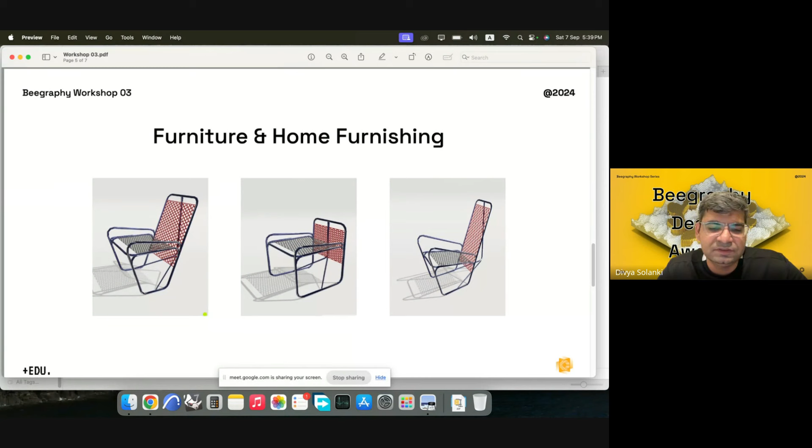You can always modify everything in the configurator mode. This would make it much closer to what the BIM ecosystem does.

Then the third category is education. Here we'll deal with a certain aspect of education where it makes it much easier for students to understand large scale concepts which are quite difficult to understand. So this can easily help us through the platform of BeeGraphy.

So I'll start with the first category that we have today, which is fashion. This category, sorry.

This category, the intent of this particular section of the workshop, 3A, is first we'll have the workshop intent.

Then we'll try to understand the existing references, and then we'll try to build a design logic, and then we'll explore the design on BeeGraphy, and we'll try to import some materials, and then the challenge.

The brief of the challenge provided on the UniXYZ platform is: this particular section would be for fashion designers, jewelry designers, textile engineers, tech enthusiasts, and it's related to style and innovation in fashion and accessories.

It wants to get out timeless aesthetics, creating wearable pieces, but with function and fashion. At the same time, it needs to harness the capabilities of BeeGraphy as a platform. And how do you incorporate parametric design into your fashion pieces? It needs to be form, functional, and wearable.

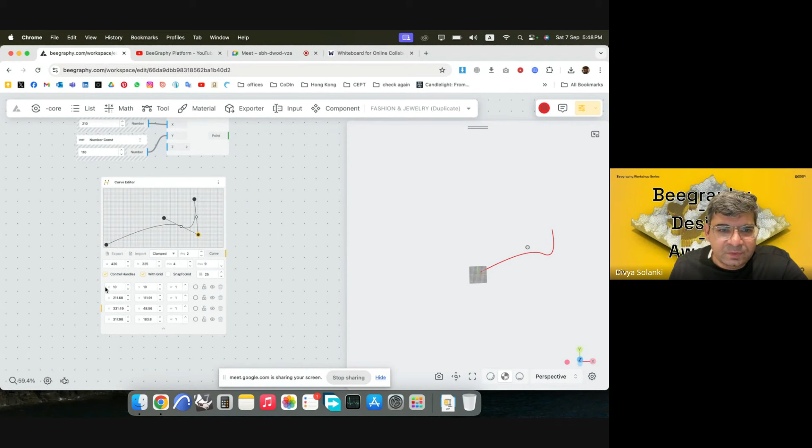The next thing I want to do is find out where my starting point is. One of these would be my starting point, coming at this one. So I'll keep it at this point and develop a geometry around it. I want it to be a closed curve, so I'll click on this tab here and make it closed. Now I have a loop, and I can modify these points.

I want the starting point to be at this location only. So I'll double click on the curve at any point so I can have more points in the space, and develop a basic geometry for now. As you can see, we have a basic geometry, centered around - I'll just move this a bit aside. So you can see we have our base point and a curve based here.

Now I'll switch on the mannequin. We want this curve to be located somewhere around the chest area of the mannequin, so somewhere here. I'll move this curve first here, then move it up. For doing that, I'll use vector to point - we want to move the geometry from the base point, which is here, to the 0,0,0 grid point.

So construct point, and this would be our second point. We now have a vector which goes from here to here. Now I'll move this ahead, then move this curve to that point - and you can see it has moved to that point. Now I'll move it up, again in the Z direction.

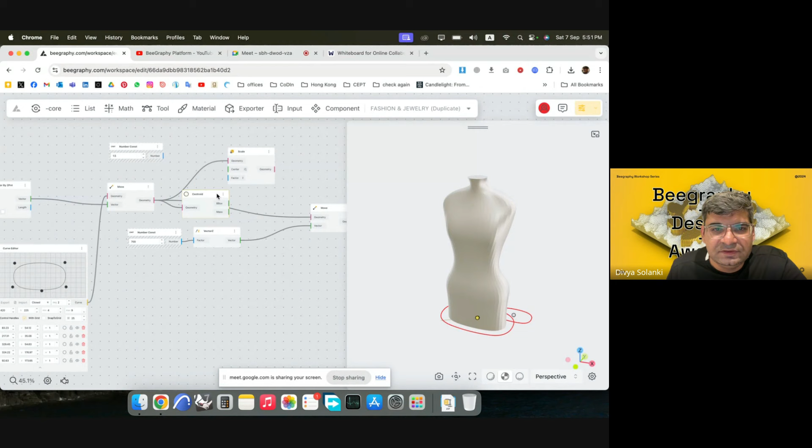We'd have to give it a centroid, which we can get from the geometry itself. Oh wait, I think we need to do this before we move it, because we already have a base point in place. If I go back, the center point we can take from the base point we made, and the scaling I'll make as a range.

So 1.5 range input - this would be scale first curve. Then I think I'll move the geometry, so I'll move it ahead. Now you can see the geometry is somewhere there. I'll switch off the previous parts, and we'll try to modify this geometry based on the outline of the body there.

So we can easily move any of these curves now to fit onto the mannequin. I can introduce more points - there are two ways to do this. You can either double click on one part and introduce a point, and it would be visible here at the base.

Or if you want to be very precise and introduce a point between two of these, you can check this point and that point, and then come here and add a new point. So then this point could be taken a bit ahead - I'll move this a bit back.

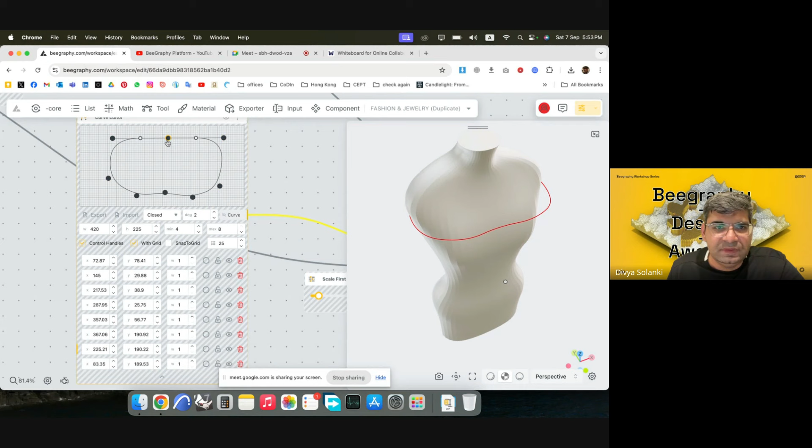And we'll do the same thing between these points. I'll add a point here and move it a bit ahead. And we'll add another point between these two, which would be here. And then this can take the shape of the back.

Divya, I can show you a trick. When you click on the points, you can see the white control points. If you click on one of those, double click, it will add a point there. So even that way we can do that. Thanks, Lonik. Yeah, you're welcome.

So we just have to get the contouring of the body right, so that it can help us make some of the form. So I have a base form ready. Can make it a bit more symmetric. And the amazing thing is that you can always modify the shape later on.

So I have one of the curves ready. The next curve I would want to develop is somewhere around the base, so I don't have to redo the whole thing. I will just be copying this.

I will also introduce you to a node. If I double click on one of these wires, we'll have this node popping up, and this is basically carrying the data from here, and this could be put in place of directly connecting it from the main output. So if I put it here, you can see I can use it like that.

So now if I have to develop more curves, I can just copy this whole set multiple times. I will develop this. If I decrease the height to 500, you can see the curve now is at the base, and I can now reduce down the points to fit to the waist.

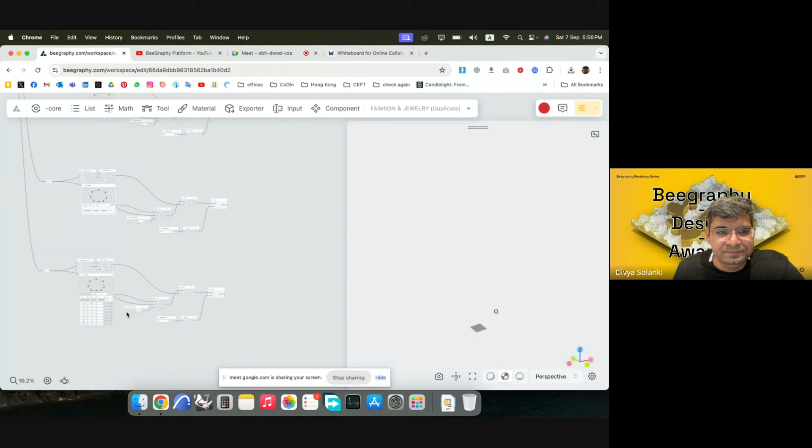The next thing we can do is for the lowermost part. So I'll copy one more time. And this time I will try to rotate the base. I'll take this down to 0.

My mannequin actually starts at the grid point, so it's supposed to go up, but it could change as per your subject. So if I'm doing something for the lower part as well, then I'll raise the mannequin and introduce the legs as well. In this case, I don't require that. Okay, I think this is too wide, so I'll just reduce down this a bit.

And then I'll try to rotate the bottommost curve. So for doing that, we can go to the lowermost curve. We will write rotate, use the rotate axis tool. You just have to provide it the curve, and then you would have to provide the centroid.

So centroid can come from either the grid itself or the geometry. So centroid, put in the geometry, I'll put this into the center. Then we would have to give it an axis. I wanted to rotate on, say, the y-axis, which is this part. So I'll just give it the y-axis, vector y, and this will plug into the vector.

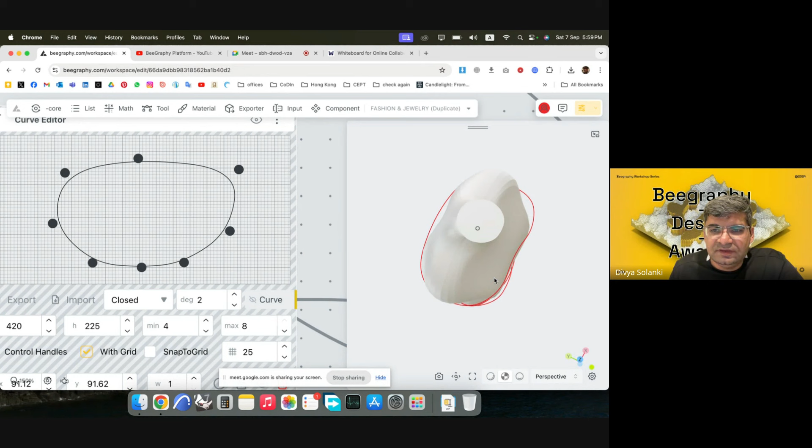So we have our base curves ready. Now what we want to do is give some more character to this dress, because if we directly loft it, it would look very flat. Maybe we can try to develop a chevron pattern, and then introduce graph mapper into the exercise.

I'll start with the topmost curve. Here we have it, sorry it's a bit laggy. So we have our topmost curve here. What we can do is divide the curve into points and take every alternate point in and out.

I will divide the curve by count, so I'll put in the geometry here. I will take this a bit ahead because we can copy it again and again. I will increase the count to 50. Sorry, this needs to be a range input, so I'll just write 50 range, and make this the chevron count.

And I'll put this in count. You can see it has developed points for the curve. Now what I can do is make two lists out of the points.

I can put every alternate point in a different list. For that we can use dispatch list, and I'll put the points in. You would have to provide Boolean for that, so I'll just write true, false. Boolean is basically true and false, so it's like 0 in one list, 1 in the second list, and that pattern continues 0 and 1 continuously.

So I'll put two of these, one false and one true. If I switch off the previous, you can see it's 25. I would have to switch off the previous as well. So you can see alternate points have been put in list A, and the other list has the other points.

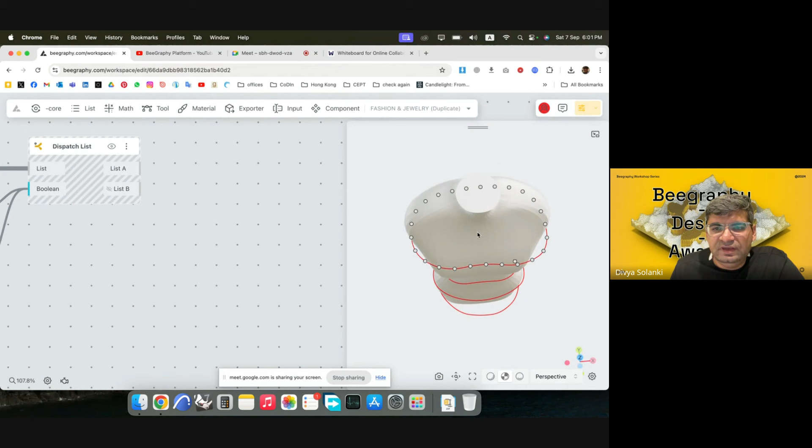Now what we can do is preview on one of them, and then try to move these points out. For moving this point out, we would require a vector going in that direction. Maybe that vector we can achieve by the centroid of this shape, so I can take a center point, and from the center point have a vector going to this point, and that gives us a direction.

So I'll do vector 2 point again, and then introduce a centroid from the curve. So this is the moved curve. I can make a node here, and use this node for the geometry. So this gives us a center point.

Now what we can do is make a vector from point 1 to point 2, and we have the vector. So now we will just move these points and give them an amplitude. The vector is there, but we would still have to give it an amplitude, how much distance it has to move, and I'll plug that into the vector, and into the geometry because that is the geometry we want to move.

Now what we can do is try graph mapper here. Graph mapper can basically give us quick variations without manually moving each point in a gradient. First thing we can do is try a simple one, I'll just move these points by a constant of 15. So you can see these points have been moved out.

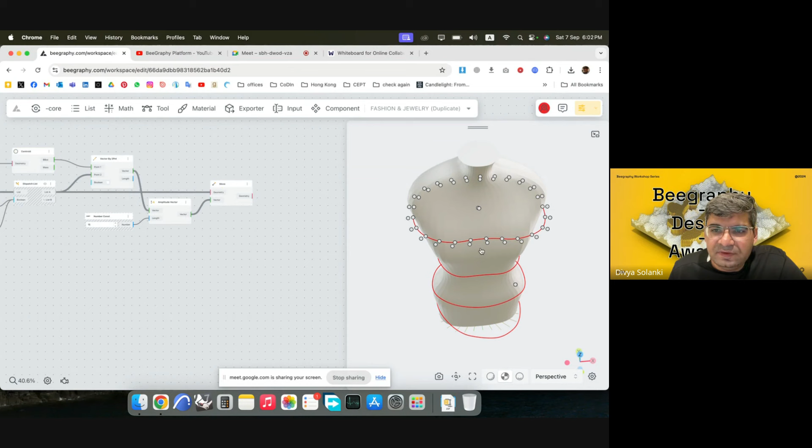And then what we would have to do, we have the other set of points as well, these ones, and we would want to develop a polyline going from one list to the other. So first we would have to weave these two lists together. The first one I will do is this, and then the second one I will do is this.

But it is asking for a number, which is basically a Boolean. We would have to give 1 and 2, so it asks for a pattern here. I will just write 1 and 2, and give it both of these numbers as our pattern. What it will do is weave from the first list first, and then weave from the second, and this continues for the whole list.

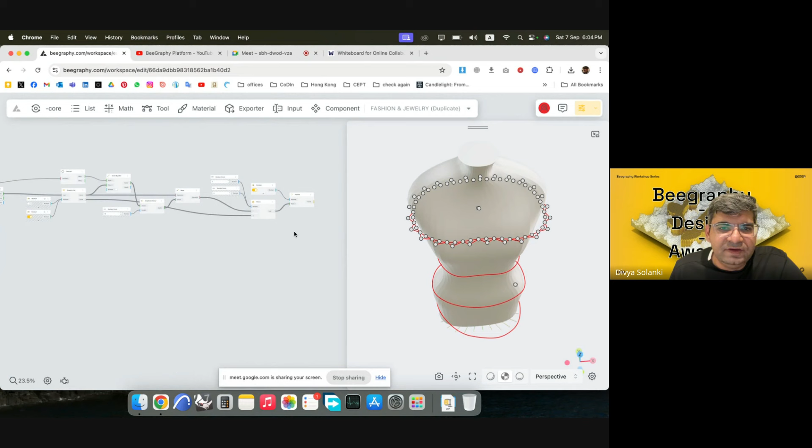So now again we have 50 points with us that we can interpolate. I will use a polyline, this one, and then plug this in. Boolean requests you if this needs to be closed or not, so I will write true for that. I'll get the Boolean and put this in here. Now if I switch off the whole of the previous part, you can see we have an interesting chevron pattern to the curve.

Now, what I wanted to try with the graph mapper was that maybe we don't want this to be a constant distance from the base curve. Maybe we wanted to go in a gradient. So instead of this 15 here, which is a constant, we can try remapping based on the number of points we have.

So if I open graph mapper, you can see there is a base where the graph would be located. I can select multiple graphs, maybe I'll go with a sine. The domain for this graph is 0 to 1, 0 to 1, and 0 to 1. So basically the graph is only this purple thing that you see here. It's only restricted to that right now, and the domain is only going from 0 to 1, 0 to 1.

But we want it to reflect here, like this smooth result. We want it to reflect here. For that, we would have to give it the number of points we want to move out.

So if I go back, I can first analyze what my list length would be. If I get the input from here, I can see that my list length is 25, and I can base my graph on this list count.

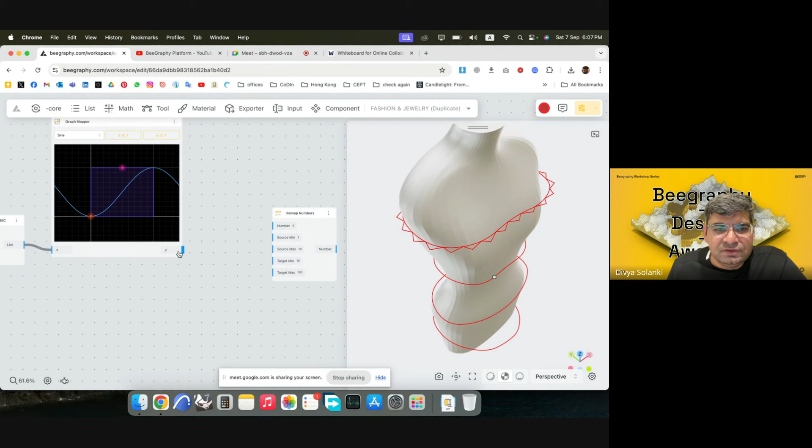So now we have this pattern with us, basically, and then what we can do is remap this pattern onto our distance from the base curve. So this source is going from 0 to 1, so the remapping thing would also go from 0 to 1. The numbers that we would have to provide it are these, which is the output of the graph mapper, and the source would be 0 to 1. So we would have to again provide a domain which goes from 0 to 1, because these numbers are going from 0 to 1.

So now if I put this here instead of the number constant, you can see it has already mapped it, where it starts slowly increasing the distance as it goes till the end of the curve. So this could be an interesting twist to a simple pattern.

I'll move this ahead. We can also change the curve. So if I go for a Perlin, you can see it is not as variable, but I can increase the size to increase the variation. Oh, it's too small, yeah.

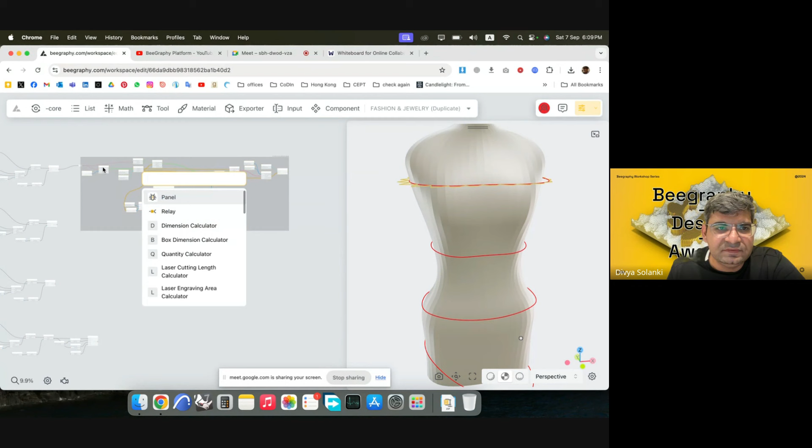We just have to copy the same pattern to all of the curves that we have, so that's why I made a node there. I'll just move this part a bit ahead along with the node, and then copy this whole geometry 4 times. So I'll put this into the node. It can be a bit laggy if there are a lot of polylines involved. Yeah, so you can see it has been replicated there.

Then I'll do the same thing again for the next one, and the next one. Yeah, I'll move this here. Once you see that hand symbol, then it has detected the node. Same with this one, great.

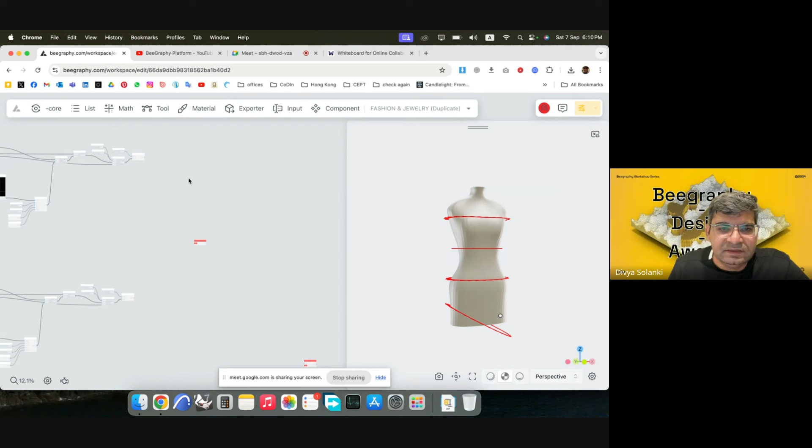So now we have a variation in all of them. What we can do now is just loft all of these together. I'll introduce a loft surface component, and also introduce a list merge. This is basically merging all of these different curves, but in a sequence. So this is our first one, I'll start with that. I'll take this up a bit, and put this in. And then if I go to the list, I can add a point. I'll move this down, plug this in.

Sorry, it's a bit laggy. I did not introduce a point, so I'll add a point, and then I will add the third one. Then same thing I'll do for the last - first add a point, and then I will add the last one.

Now I can put this sequential list into the loft surface component. I'll zoom in, then plug this in. I'll just check if the list is in a single branch - it looks like it's a single branch, so I'll plug this in. I can increase the degrees to 3.

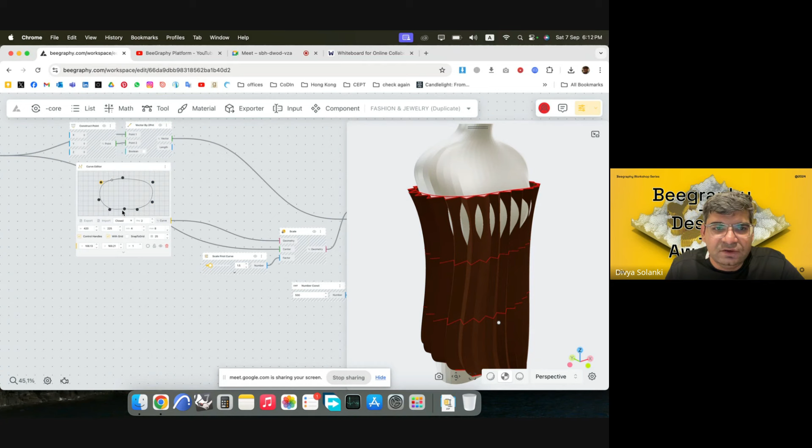Looks like the dress is still intersecting with the mannequin, so we would have to modify one of the curves. Maybe we can try modifying the middle one a bit so that it fits. You can clearly see the parametric nature of the script. So maybe I can increase the size a bit here as well as here. I can also add more points. It looks flat now.

You can see how easily we can modify each of these curves, and we can also change the height if we want to increase or decrease the size of the dress. Maybe I want this to go a bit lower, so I can go down to the last one and change the height from 0 to -50 or more, maybe -500. So you can see we can take the dress much lower if required.

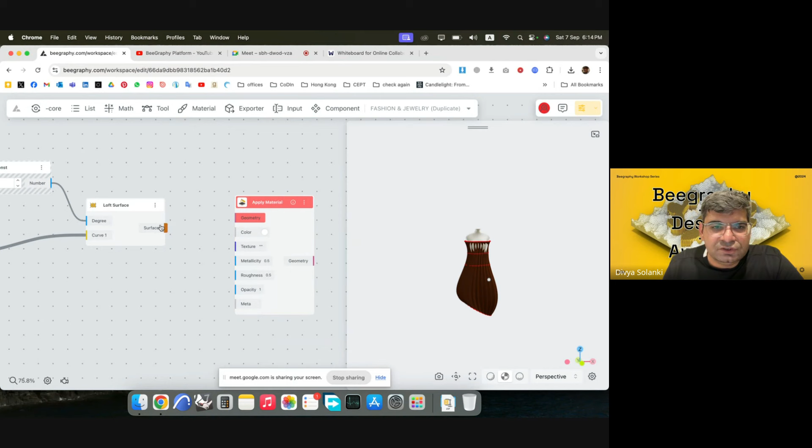Then what we can do, we can also try importing textures to it. For doing that, we can use an online library. So if I write texture, apply material - I'll just go material. Geometry we want to apply is this. Now we can give it a texture string. Let me just show, just a second, I'll stop sharing.

So for giving a texture to the dress, what we can do is we can give a string output here. So if I write text input - if I write input, we have it here, and then the string we can provide.

We can provide the string from the Polyhaven website. If you go to the Polyhaven website, you can go to their textures at polyhaven.com/textures, and then here we can go with a fabric texture. There are multiple of these, preferably ones that are slightly older. If I go into the fabric pattern here, I can use this one. I can just copy the texture URL, the name of the texture, and put it as an input file in the text input parameter, and put this in texture. It can take some time, but then you can see it reflect.

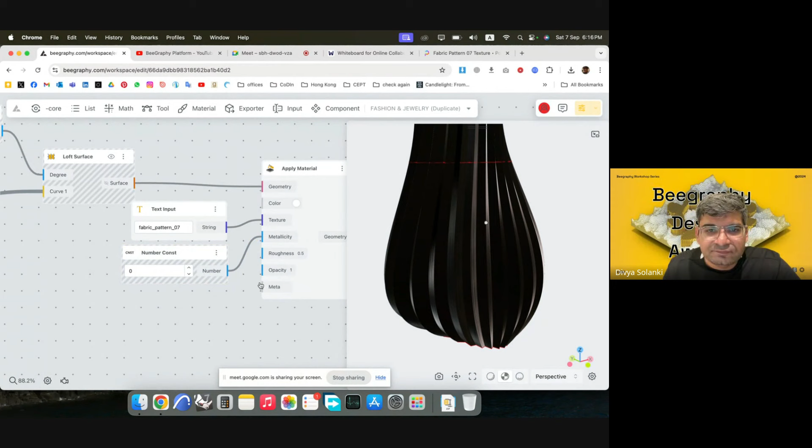I would have to switch off the previous paths. I would have to decrease the metallicity to 0, roughness to maybe 1. In fact, this was experimental.

Have you tried this particular pattern? No, not all the patterns. I'll try a different one. Maybe we can go with, especially, denim. I'll try denim first.

You can see it has taken the denim's color and the texturing, so this can help us give a good gradient for the dress. Now I can maybe try to develop - in the same way that we have developed this, we can also develop a necklace for the object. But I think I will like to stop here because we have 2 more workshops.

I think you can explain about the material part, because right now it works only with Polyhaven, right? And some of the older textures, which Lernik mentioned in the Discord.

Currently, it is based only on Polyhaven, but there are other things being tested. So the textures that are older than 2 years would work better - they would give the correct results. If you go down, you can check what year is written on the texture as per your requirement. For instance, brown leather is 4 years, so I can just select this and use it as our texture in text input. You can see it has taken the texture color, so it would work mostly with textures that are 2 years or older. Some are 4 years, so that would be fine. The newer ones are still in beta testing, so they would be available later.

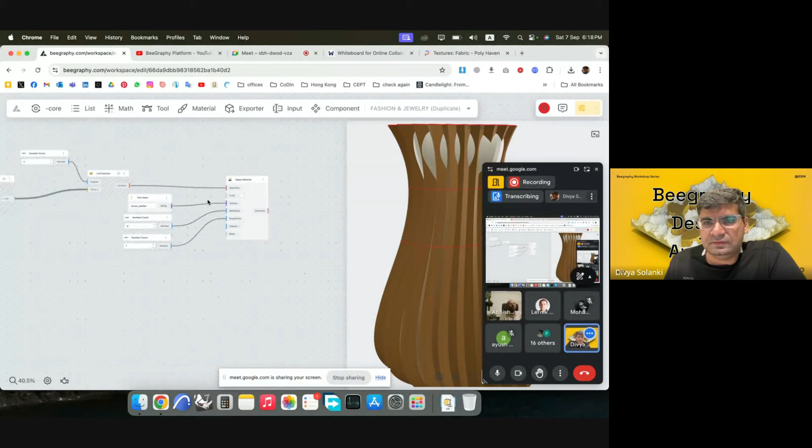Divya, if you rotate to the back of the model... yeah, it's flat there. This one, yeah, it's because of the curve. So it can take some time getting the geometry of the mannequin right, like the geometry of the curves right.

Each one can do it individually. So this is like the third one. So if I go and modify, if you can modify the last one, I think the rear side... if I can just modify, say, this part, then you can see it will modify accordingly.

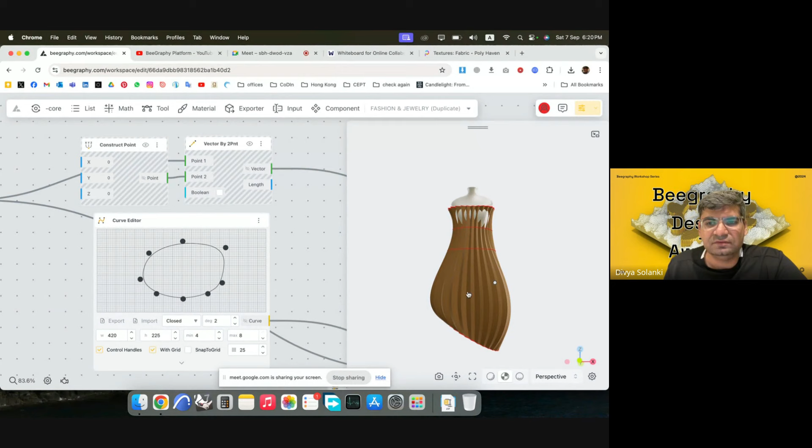So, I mean, you can increase the number of these lofts to as many as possible based on wherever the geometry is changing. So I can maybe introduce one here, like one more, and then it could be more closer to the mannequin that we have, so it will make it easier for us to design. So yeah, I mean, all of this is parametric, so it could easily be modified.

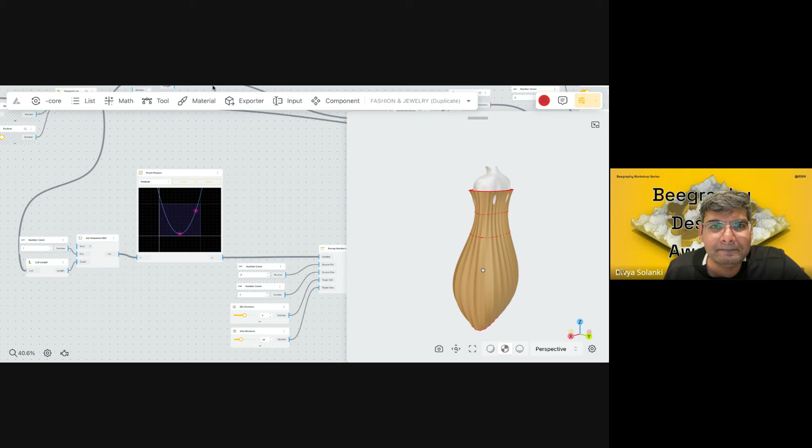One more thing - when you're using number constants, is it because it's easier for you to type in directly into many ports, like changing the default value of the port? Where, this one? Yeah, like if you disconnect the wire. Yeah, I'll just do it. Oh, sorry, yeah, you can click on the one.

No, right in the port. Yeah, at the top, where the one is. Yeah, over there - I think the cursor doesn't point in the right place. So you can change it from there.

In many cases it's more convenient, unless you need a slider. I personally prefer to add a number constant, that way I remember what is the input provided by me versus the default values that exist in a node. It's very useful because it makes the script a lot cleaner—whenever there are standard values, they can be added directly without stopping the process.

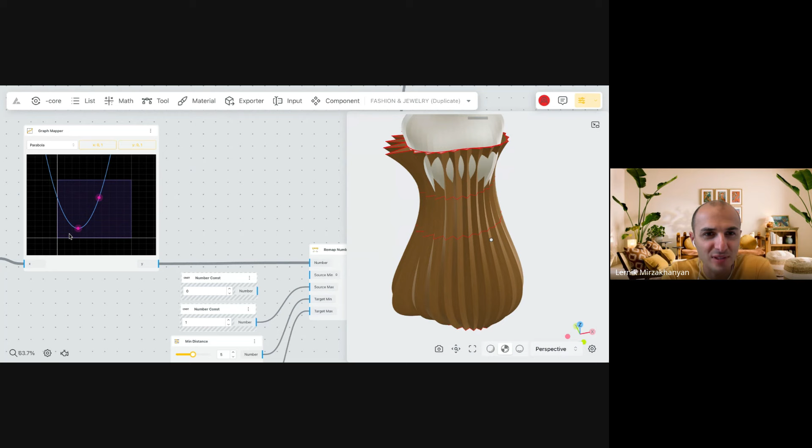One more trick which is standard in Grasshopper, but in BeeGraphy we thought it would be easier: an easy way to disconnect a wire from the port—in fact, all wires from the port. You don't have to drag all the way, you just hold control (or command on a Mac) and click on the port to disconnect. Especially when the ports are far from each other, it makes it a lot easier.

There's a question from June—not really a question, but she wants you to show the material node block and how you applied the texture. So if you can please repeat the process of applying texture. Sure, before Divya repeats it, I want to add something.

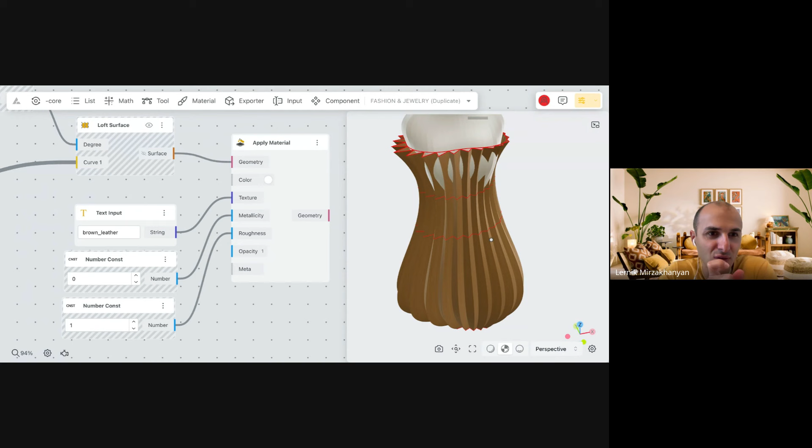Divya, maybe you can show what I said and what you were actually doing. It's the same thing—once you put the geometry into the apply material node, you can provide it a color as well. But if you want a texture image, you can use a string input. Then you can adjust the metallicness, roughness, or opacity of the objects. I can try that—if I put this here, I can reduce that down. Sorry, it needs to be between 0 and 1, so maybe 0.5.

So the next thing we want to do is give a texture input. If we go to the Polyhaven website, you can go to the textures section, and you'll have multiple textures based on type. You're not sharing the screen, just the tab. Oh, just the tab, sorry. Can you see this now?

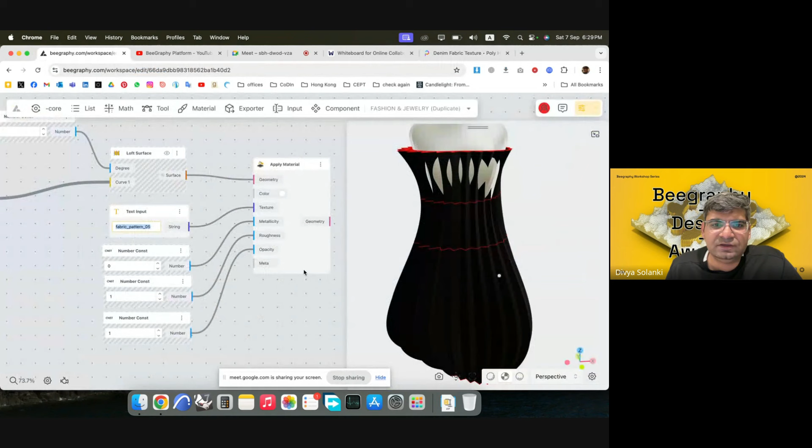This one is 10 months old, but the particular component works better for textures that are 2 years or older. For me, when trying the denim fabric, this was working. So you open the textures page, go to the URL, and select the last part of it. Then you go back to BeeGraphy workspace, and in the text input paste the last part of the URL, and you can see it has been mapped here—that's the UV mapping, though changing it through UV mapping is a longer process. So this is how you can basically apply textures to your objects.

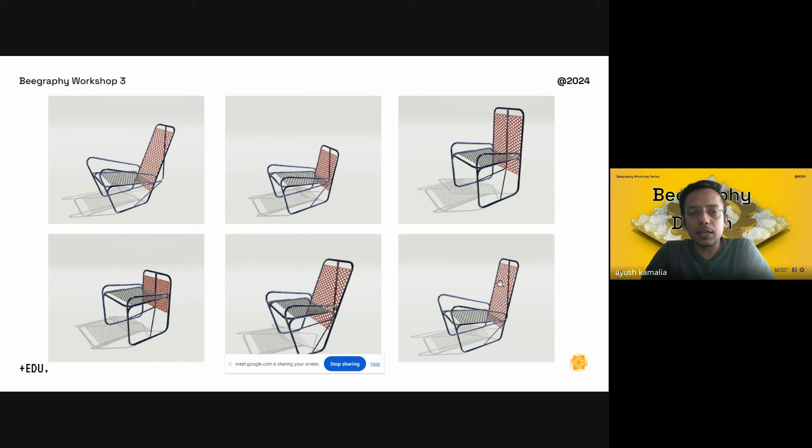So it could be a low backrest lounge chair, a normal work chair, or a dining chair, whatever you want. You just define one process once, and then at a click of a button you can get another design out of it. Let me give you a sneak peek of how and when we can get another design.

Let me show what we will be able to achieve by the end of these 45 minutes. This is my configurator mode. I'm pretty sure you're aware of it, but if not, no problem, we'll go into detail in the next hour. What this mode empowers us to do is that we, as designers, are not required to share the script or the process with anyone.

The first thing, being a completely online tool, there is no requirement for anybody... Let's say if somebody is your client and you want to give him the freedom to just change the chair the way he likes it. They are not aware of how to use the software, they might not be having it, so you can just share this configurator link to them.

All the variables can be seen on the right part of this window, and they can easily change the parameters which they like. So for example, they like a higher handrest instead of a lower one.

Let me just reload this so we can get onto it. In the meantime, we can start setting up our script to achieve that result.

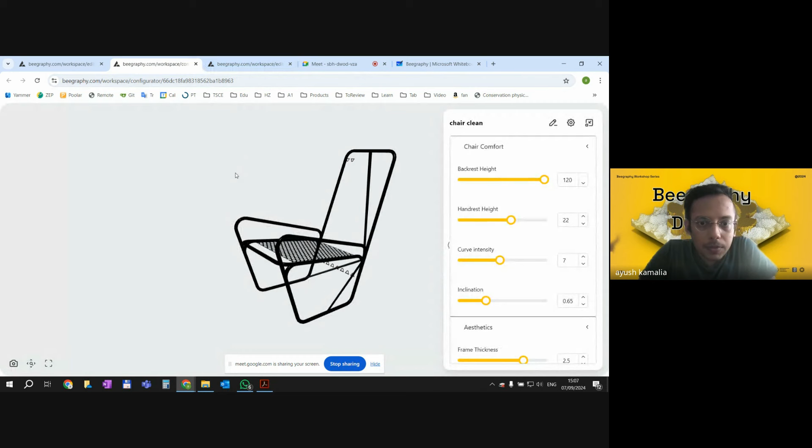We have our chair. Let's say I want a smaller handrest, and then we immediately get to see the design on the left. We have so many different parameters about aesthetics, how much meshing you want to have here, what should be the thickness of the frame, a sleek design or a bit bulky one, and most importantly the ergonomics - what is the front width we want, how high we want it to be.

With this, we get the power that I need not to compromise with a standardized product from the market. As a designer, one of our biggest intentions is to provide as much comfort to the user as possible. So based on individual design preferences and individual body preferences, they can configure their chair and immediately see how it looks.

So now let's get into it to start. If I wanted a static chair, it could be done in a much simpler way. But with this, we are trying to parametricize everything as much as possible, so there are no static inputs - everything comes from the user or is connected to the other parts of the design.

So looking from outside, it might look like the script is quite long, but the intention is that by having a slightly long script, we get the freedom to have any design, any configuration out of it in the future, based on our personal needs.

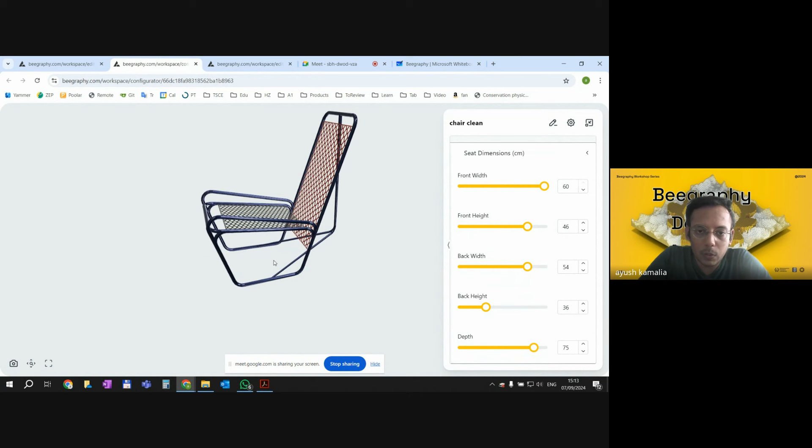Okay, so now I have these 5 range inputs which the user can provide. I think I have all the inputs required to create this piece, the one side where people actually sit. Let's see how we can create this piece, let's just do a little sketch.

Ayush, I think you made the depth too big, I mean the max. Oh yeah, it should be 75. So let's say this is the kind of side panel we want to achieve. What we can do is create these 4 points based on the width, depth, and height provided by the input, and then connect them with a polyline. Then in the end we can provide a fillet if we want a curvilinear feel to it. So let's start creating these 4 points.

The bottom left thing: first, as I told you before, we want to make only half of the chair because we'll mirror the other half. So whatever the user-defined input is for the width of the chair, we just cut it by half, divide by 2, so that we are making just the right part of the chair. I can take a division and divide by 2. Since I always want it divided by 2, I can just enter that inside the panel itself rather than having a user-defined input.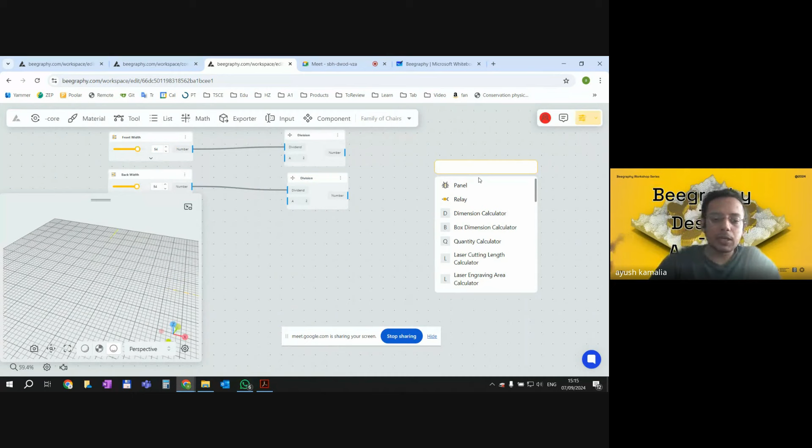Let's try to create this point here. It should just have the front width. And this other point should have the back width as well as the depth of the chair. Let me start by constructing a point. It's at 0,0 at the moment, but we want it to be at the front width point, moving in the x domain.

So this is perfect, this is the front bottom point. I can have the same point at the back on the x side, but it needs to move in this direction too, so for that we put the depth on the y side of the chair. Great, so we got the depth and the width of the chair on the bottom side.

Now we want the top points as well, where people are actually sitting, the sitting height. So we just have to take these 2 points and move them in the z direction. I can copy the same point and apply the front height as the z value here. Perfect, it's pretty high, let's get it a bit down.

For the back side, we can take the back point we defined and move it up in the z direction. Great, we get the point. If the back height reduces, this point should ideally go down. It is happening, so we are okay, it's happening as expected.

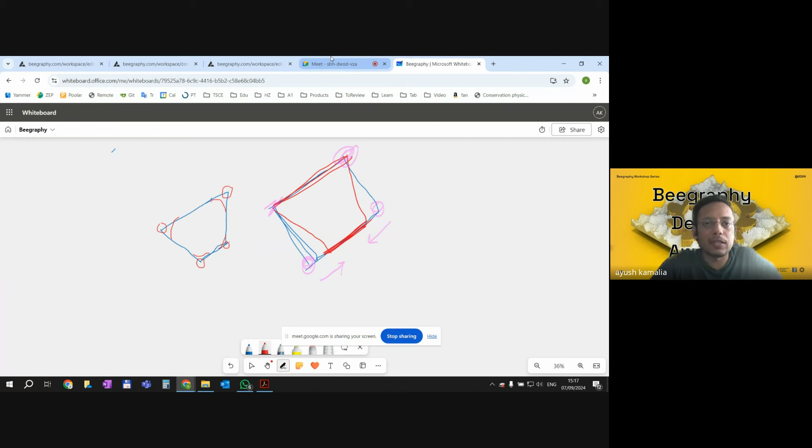The second thing we can see here is that we are not defining perfect rectangles on the side. If I give the front view of it, it's not a rectangle, but rather we have a slightly smaller base, and then we get a panel that looks something like this. The top 2 points are okay, but the bottom 2 points are right now at the front and back location. We have to move them inwards if we want the base to be smaller than where people are sitting, so we just have to shrink them in.

Multiple ways to do it. Probably how we can do it is by creating a line between them and then scaling that line down from its center point. So let's first create a line.

No, this is the top line. We want to scale our base, so we have to use these points, the front and the back. Perfect. And now I want to scale it at the midpoint of this line.

So first, scaling goes to geometry. And at the midpoint, we already have a component known as middle point. Let's get the curve through here, and let's get the point as the center point. Now, if I just turn on the visualization of this line, we see that the line is getting bigger because we have a scale factor of 2.

It's up to you whether you want the user to have control of this factor or if it is a static part in your design. For me personally, I would like the users to take care of how much scale they want the bottom part to be.

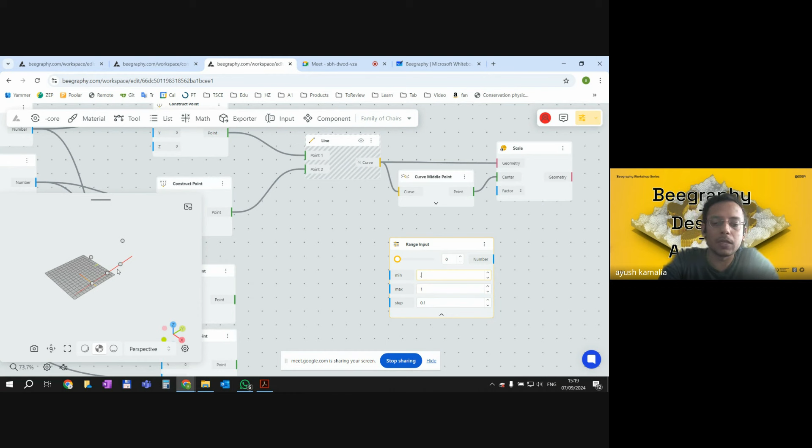So I can add another range input. I do not want it to be bigger than the top part, so my maximum range is 1. And I also do not want it to be smaller than half of this, because then the chair will become unstable, so let's put 0.5 as the minimum limit for it. And then if I put it in the factor, we see that I have a smaller base now. I do not want to see this middle point.

And what we saw some time back, is that we need these 4 points, and then we are going to create a polyline and fill it. To get the points of this line, we can just directly use the endpoint component, and we will get these 2 points.

So let me switch off the visualization here and the visualization of the line, and now we have the 4 points. Simply, we can merge them to create a polyline. Merge will just combine all of these individual points together into one list. So if you go to the list...

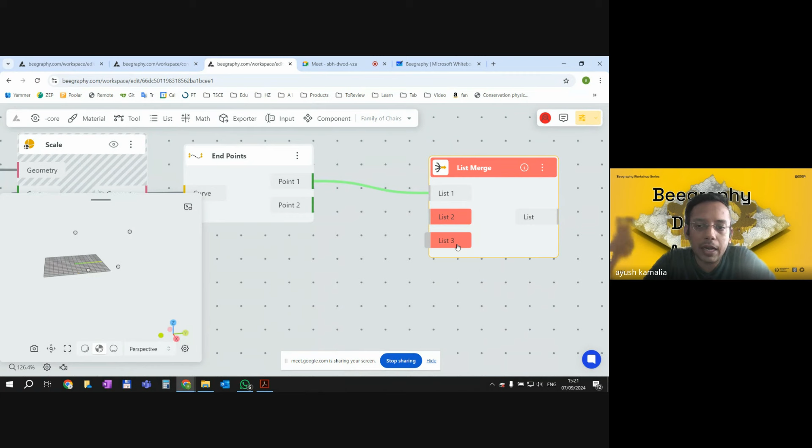Visually you will see only one port to provide all your input, but there is a hidden feature. Whenever you click on any of the input nodes, just click on add port, and you can add as many input ports as you like.

Perfect. Second point goes in, the third point, and the fourth point. Let's switch off everything. I have all the points here, and now we just need to create a polyline out of it.

Polyline - we see that the order is very important when we are creating a polyline. My fourth point and the third point should ideally be reversed. So I can just select the fourth port and click move above, or I can change the input order of these things.

No, I did something wrong here. These 2 points should be changed.

Okay, so we got the correct order now, and I want the polyline to be closed. So I can just simply click on the Boolean and we get the closed line out of it.

Great, we have the main panel where people are sitting, which is parametrically controlled. Let's say if I want the front part to be higher, this point should go up. Let's see whether it happens or not. Front height - yes, working as expected.

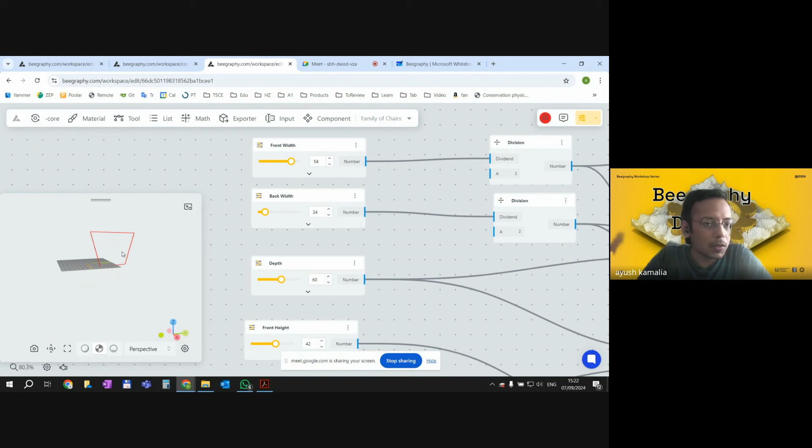If I decrease the back width, this should come inside. Back width - yeah, okay. Everything is moving and working as we intended it to be. So we got the first part for our chair frame, which was, let's say, the most important and the most tricky part.

And let's apply this fillet as well to get this curvilinear feature there. Let's do fillet geometry. The curve goes in there, and I want the fillet radius to be controllable by the user as well. Range input goes here, and then it is fillet radius.

What is the minimum? We can have, okay, at least you can have minimum as 1, and maximum it can go up to 12 centimeters to 10 centimeters, the way you like it. And then let's have a step of 1 centimeter so people can change it accordingly.

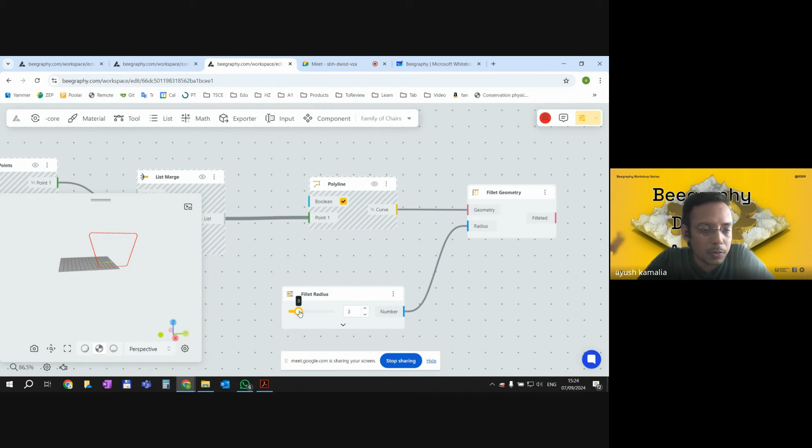And I hide the chair part, and then as I am increasing the fillet, the curve is getting more prominent. Great, let's keep it like this. So we got the first part.

Now let's go on to the second part, which is, let's do this backrest thing. And as we see here, this backrest is actually an extension of the back curve of the panel that we already created. So the backrest is an extension of this curve. So we can start by using this line here.

Okay, for this line, we need this point and this point. So these two line points are responsible for this line, not exactly this point because we already scaled it. So we have a different, smaller, scaled down, moved in version of it.

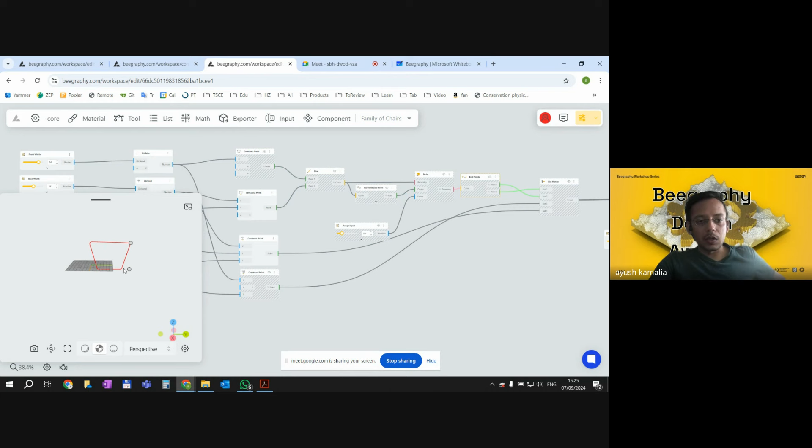Let's start by creating this back panel line. It should be this point, which is the scaled down version, and this point. You do not see it at the moment, but I promise you there is a line. You can see it slightly in yellow. So this is the line which we just created here.

Now to extend this line in the same direction, mind that it is not a 2D line because we are changing all the parameters around the chair. So we can create a vector, and there is a wonderful component to do that, which is vector by 2 point. What we have to do for this component is provide the first point and the second point, and then this component gives us the direction between them. So it's not necessarily along a cardinal direction, X, Y, or Z, but a combination of them in any possibility. We can get the points directly from above, but to keep the script a bit cleaner, we'll just do the endpoints of this line.

And then I start my vector from this point and end it on this point. So this blue line you see, this is the direction which this is taking.

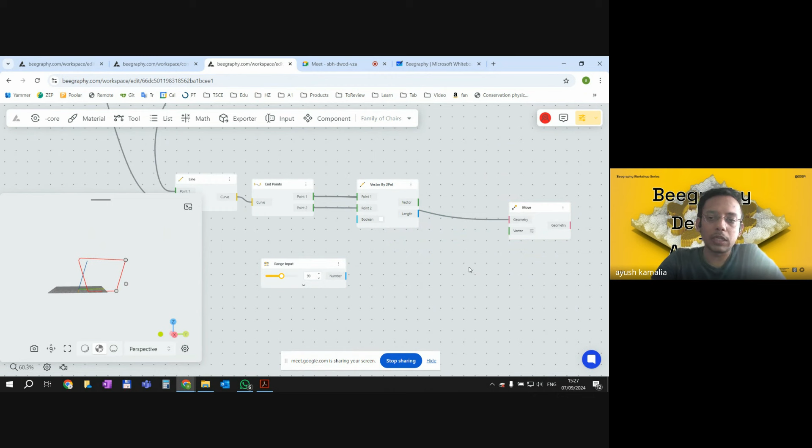So to combine this vector with this numerical input, we can use the component known as amplitude. I get the direction as the vector, which I found by using a 2-point vector, and then amplitude, or the numerical side of this vector, goes here from the range input, which is user defined, and I can plug in this combined thing inside this. Great, I got the height of the backrest.

This is the point where the backrest should stop. If it is going up and down, as I do, yes. So everything seems to be working okay.

Now, what I want to do is have this connection till the center point to this point, from here till here. Right now, what we got is this particular point, the extreme height of the backrest. So let's just create a line from here to here. And how can we do that?

We know that this plane is already existing and we want to mirror our chair along this y-axis. So I can just project this point onto this YZ plane. And then we just get that third point as well. To project that, we can use a closest point to either geometry or plane. We have a clear plane along which we want to mirror this half of the chair.

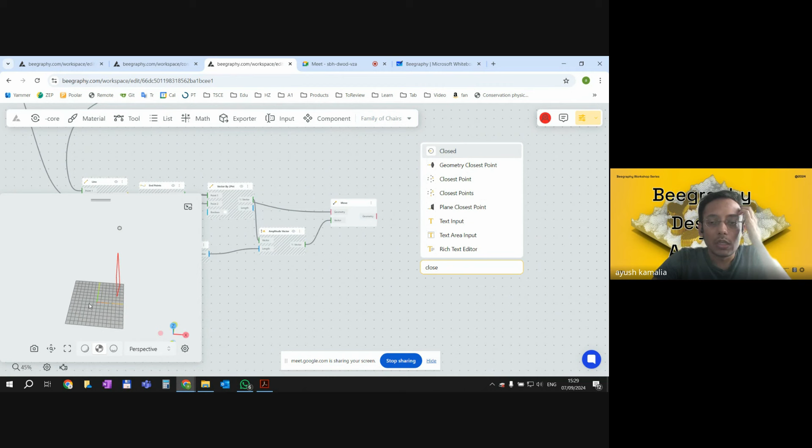So we can use that plane directly, which is the YZ plane. So let me take a YZ plane, and give me the closest point projection on that thing and this point. Great. So I got this point from this component, which is closest point.

I already have this point, and now I just want to connect it to the chair base frame which we already created. The thing is, if I connect it to the bottommost point, there will be a straight line going till the very bottom. But we want to have this curvilinear thing, which gives a kind of floating impression.

So what we can do is create this frame just till the midpoint of this line. We already have this line here, here. So what we can do is just take a middle point of this line. Yeah, so now we got these 3 points, first, second, third.

Let's just connect them in a polyline, and we will have the second element of the backrest as well. We use the same thing as before, which is list merge. Let's start with this point, which we found from the closest plane. Let's set the port, use this point, and then finally the bottom.

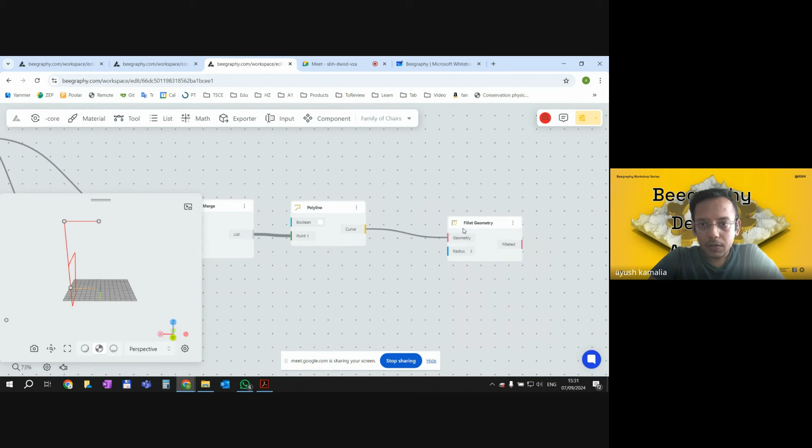Geometry, and for radius we can use the same radius which we used from the user in our last step. Let's hide everything else, and now we have our second, let's say, unidimensional element as well, working fine.

Third thing, let's create this handle here. Simply, what we can do, we can follow the same approach we followed for the backrest, that we took this line and create a vector out of it as an extension of it. Similarly, we can apply that here. We can take this line, create a vector out of it, and then extend this thing. And then we can combine all of them into a polyline, and we can fillet it, and then we will be done.

So I need this line here. I already have this line, which we created here. So let me just take a relay, so I can take this line elsewhere. Let's take it up.

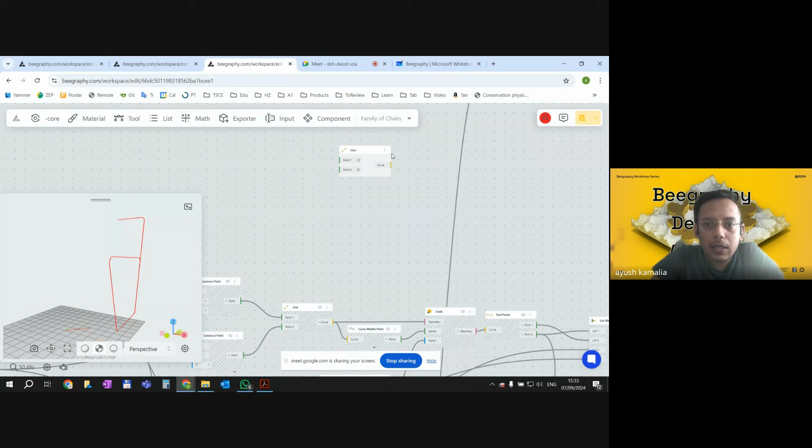And now I want to use this line. For this, again, we need only 2 points. First point will be coming from the end point of our line, and the second one is this point exactly.

Okay, I have this line. What we can do to create a vector for this line - we already have the vector from 2 points. So to create this line, we can simply find the endpoints first, and then we can do vector from 2 points. First, second, we got the vector.

Now to create an extension, we can take a user input for how high they want the handle to be. Let's have 10 centimeters as minimum, maximum it could be up to 20. And then they can get any step between, like a sequence of 2 centimeters. Okay, we have the range input, and I now need to move the point.

Which point do I want to move? The top point by this dimension in this vector. We have all the input. I want the top point to move in the vector amplitude, in this particular direction and by this height. And then let's combine all of them.

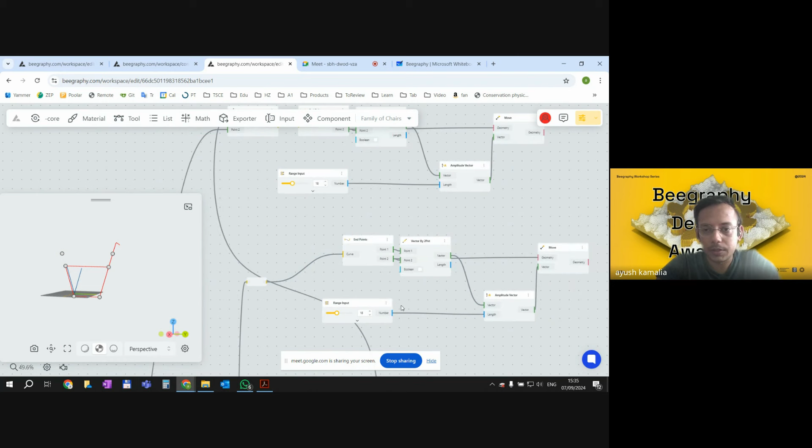We can copy the entire thing, and then let's just add this curve here. But one thing is that we do not want the user to enter a separate value for the height of the backrest in the handrest in the back. So what we can do is just take one input and make it smaller, just connected to that one. We can divide it by 2 or 3 - let's check with 3 how it looks.

Okay, so this is the point after changing it. And then if I increase the height of the handrest, both of the points move simultaneously - works perfect.

Let's just create a polyline now, and similar to the process we followed here, we want to keep the curve at the bottom alive. So we will use this midpoint to start our polyline and not the extreme bottom point. To get the midpoint of the line is pretty easy - curve middle point, we already have a curve.

And we can do the same thing for our curve here as well. So now if I switch off everything, we have these 4 points. Let's just combine them together, the same methodology as before - let's merge them, then polyline and fillet. We need not repeat the steps over and over again, so I just copied this block from our previous part, and then let's just change the points there.

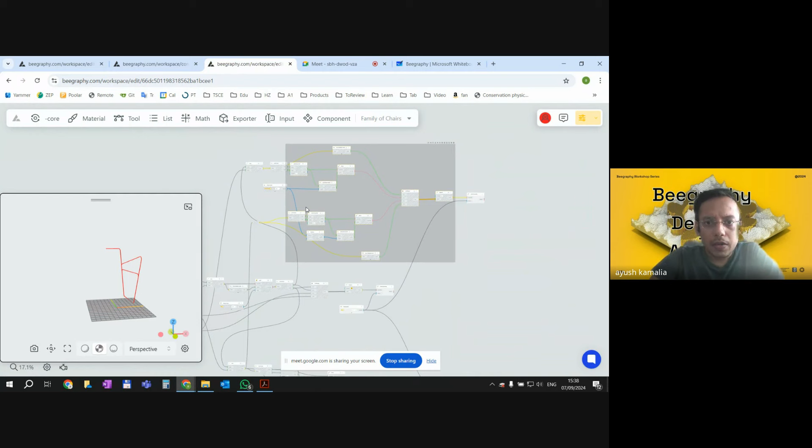So what we need is this particular point, which we want to project on our YZ plane, which is one of these two points. Yeah, this point. Then let's say closest point on plane, what plane we want to project it on, which is the YZ plane, this particular vertical thing. Let's take the plane in there and let's take our point.

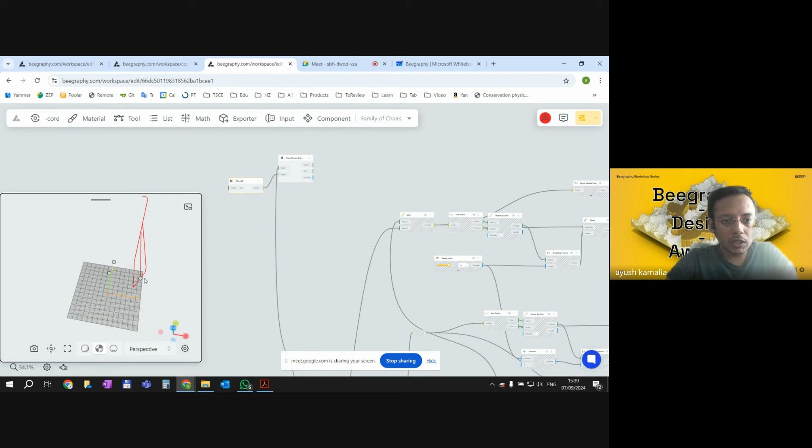Great, so we got this point, we got this point. Now what we only need is a center point here so that we do not overshoot whenever there is a high fillet.

To create this point, what we can do is create this line here, and then take the midpoint of this line. So I want to create a line from these 2 points, and then take a midpoint of it.

Okay great, so we just now need to create a similar polyline between these 3 points: first, second, and third. This is my first point, and then I can just put a relay here to get the second point, and this is the third point.

We need not manually do anything, we can copy the same block and then provide the first point, the second point from the relay, and the third point. And then this we do not want, so we can remove it, and then switch off the points.

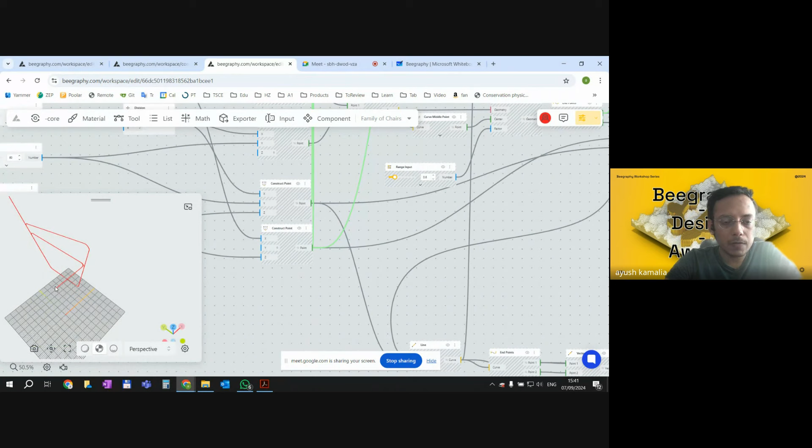Cool, we now have a frame, a boundary where we are seating as well. So we got 4 of these components: 1, 2, 3, 4. We are getting closer.

One element which this chair has is this back support, which is like a counterbalance, because horizontally there are no connections here. So this helps in stabilizing the horizontal deflection.

What this element is doing is starting from the middle point of the bottom curve, which is okay, and then it is going vertically down from the midpoint here and then getting connected there. Okay, so let's get this particular point vertically down, which is this point in our script, the middle point.

Remember that we will mirror everything along this axis. So yeah, this is the middle point from where we have to get the element down and then connect it somewhere here.

How we can get this point we already used, not this one, but this one. Okay, so we already have this point.

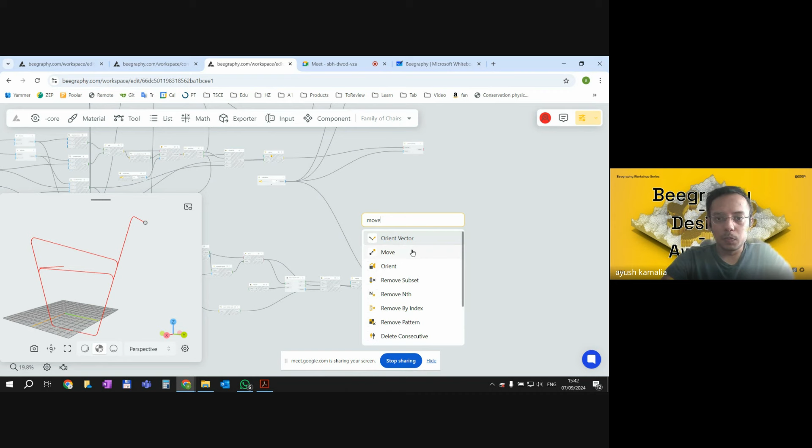Now let's just move it vertically down, which is move, when we know that we have to go in a perfect axis, in a cardinal direction. So we can use a unit vector, which is Z. We do not have to create a 2-point vector based on an existing line.

This is the geometry which we want to go down to, and how down we want it to be. We can just define a number, make it 20 centimeters or 30 centimeters higher from the ground.

So let's say, higher from the ground, what is the total height? This is the height of the backrest which the user already entered. So if I just go there, what is happening? This was the height of the user that they already entered. We want our point to be somewhere here.

And let's say this is 20 centimeters. So to get this height, we can just subtract 20 centimeters or 25 centimeters from the user-given backrest height.

There should be the backrest height, which is this. Let me rename it so that I do not forget it.

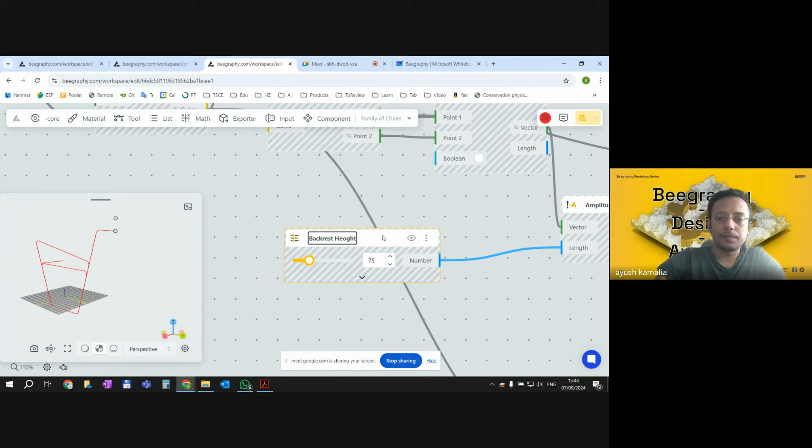From the backrest height, please subtract 25 centimeters. So I'm creating a number constant, it is not a user-defined input, so I'm not using a range input there. And then this is the number.

Strange thing, I see that I wanted the point to come down, but it went up. So what we have to do is just use a negative, an opposite component, to change the direction of it. So I change the number to a negative number, and now we see that the point is coming down.

I got this point. Now where I have to merge is the center point of this bottom thing. We already got this point. Remember when we were scaling down in the very first step, we used the center point of this line, so we should have it somewhere. Then this is the point where we were scaling, so yeah, this should be the middle point along with which we scaled it.

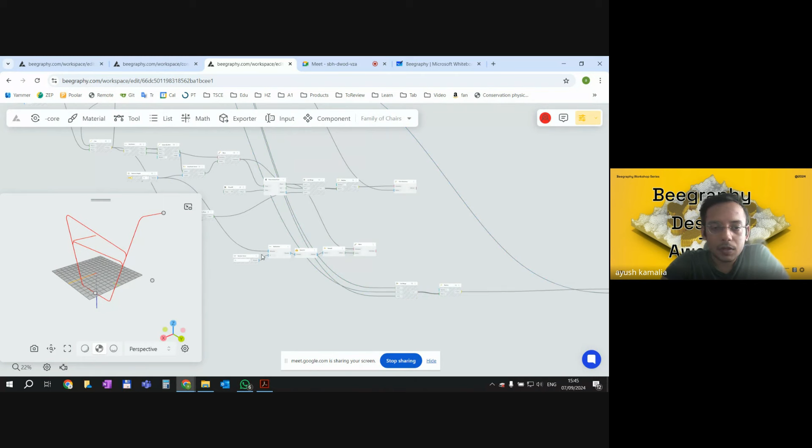Following our same routine, let's merge all of these points together. The first point is this one, the one on top. The second point is this one, which we got after moving it vertically down. And our final third point is the center point, which we just found out.

Great, we can switch off the visualization and then see how it looks.

Yes, it is looking as in the design. Let's do one thing, let's mirror them and then see whether the whole chair is coming as expected or not.

So let me take a merge component to have all our different parts into a single list. We have a total of 5 parts, so let me add more ports. And the final one.

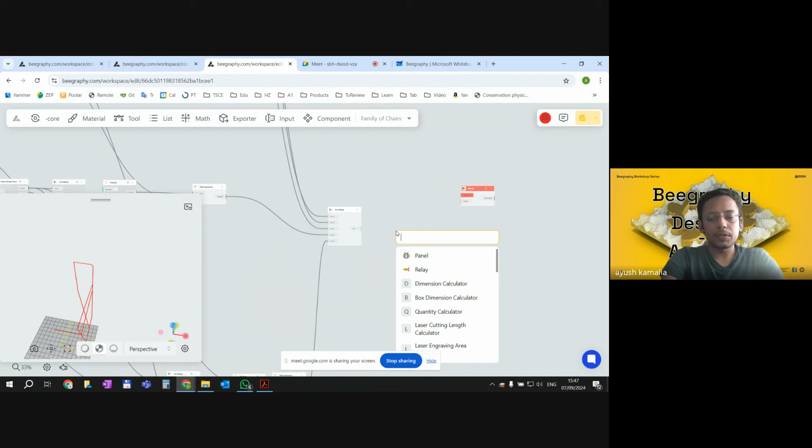It is always preferable and suggested to flatten if there might be data coming in different streams and different branches, so just flatten it once to be safe. And then let's mirror it. When we mirror it, yes, we get the chair skeleton perfectly all right as we wanted it to be. So, okay, great, this part is working.

I can disable all of them or I can keep them. It's okay, so we have the chair skeleton done. We just have to do a piping on it, which is an easy part. And then now let's get the two-dimensional elements, which is this surface where people are sitting and the back surface.

What is this seating surface doing? The seating surface, it is not covering the entire thing. We have a slight gap on both front and the back part. So only the linear element, no curved part, but only the linear element from this chair

boundary is being used. So what we can do is we can use this polyline curve and then we can extract only this particular length from it. Let me show you how it can be done.

So this one was this element, perfect. Let's explode it. So what explosion does, it gives us individual curves and points rather than a complete thing together. And we want one particular curve, which is this one.

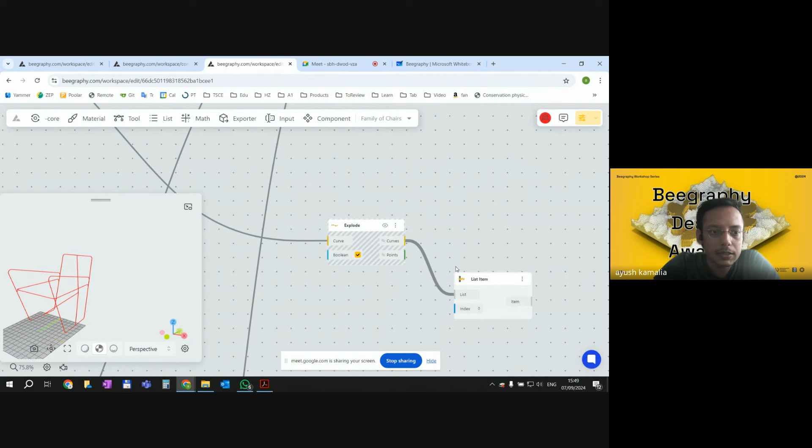So we can use a list operation, which is known as list item, which gives one item from the list. So from all the curves out there, I can hide this, I need only one item. And you see, when you just select the component, one of the curves will be highlighted in yellow.

I am not sure whether you can see it clearly on the stream or not, but at the moment, the bottom curve is highlighted in yellow. So let me just change the index number, and then it is 4 now, and then find the correct curve.

Other possibility to do it is by using a simple range, and then hiding the other parts would be helpful as well.

Yeah, this is just to show you what is happening when I'm changing the number. If I do 2, no. Yes, perfect, this is the line we wanted.

And then to create a surface, what we can do, we can again mirror it along this YZ axis, and then we can loft these two curves together into a surface.

Mirror. And then we got the 2 lines. Why are we not simply extruding it?

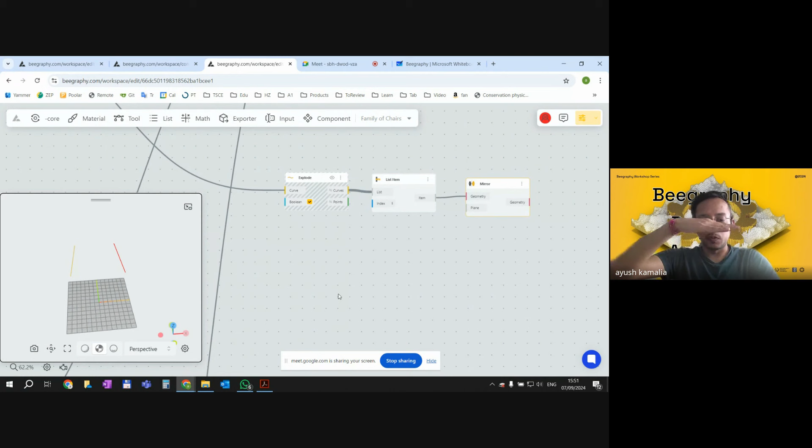Because it is not a two-dimensional planar surface parallel to the cardinal dimensions. There are changes in the back height and the front height, back width, and the front width, so it is more like a trapezium, and it is not parallel to the XY plane. It could be moving up and down. So by following this method, we are robust, and it doesn't matter what the user input, we will always be able to get the correct surface out.

So let's just add these two lines there. The first line is this one, and the second line is this one. And we got the surface out. So the surface is perfectly fine.

We now just want this pattern onto it. And if we were using, if we were on Grasshopper at this moment, we would be required to use a plugin like Lunchbox to do this. But fortunately, in Beegraphy, we already have that capability built in.

And then if you go in your tool set, and if you move around somewhere, you will find hexagonal mesh, which is exactly here, hexagonal paneling. So we need to do a paneling on this particular surface in a hexagonal way.

Now what we can do, we have these hexagonal panels. We can offset them inside and create a surface between them. But this panelization is too big for me. If a child is sitting there, it might fall down in between. So I want to parametrically control how big the meshing is. Let's take an input from our user, how big they want the mesh opening to be.

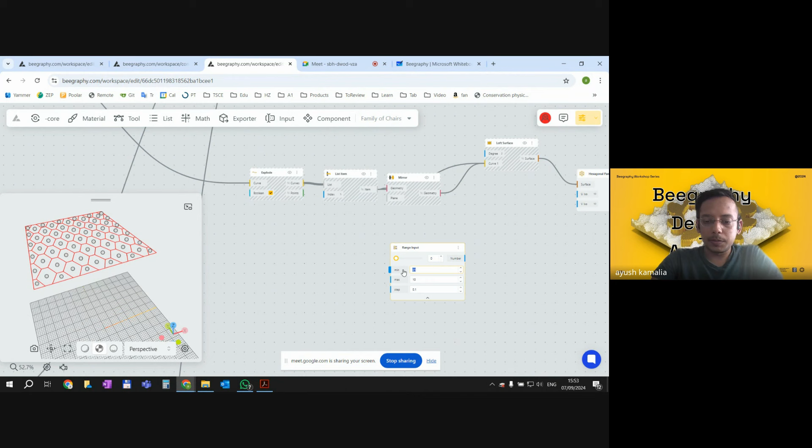Let's take a range input. Let's say 1 centimeter will be too small, so let's say 2 to 3 centimeters, or up to 4 centimeters, with a step size of 0.5 centimeters.

What I'll do is measure the length of this side and divide by this, so we get the number of U or V, the number of panels in this direction. Similarly, we find the length of this other one, divide by this, and we have the other value.

So let's take the length of this side first. Curve length, we already have our curve. And then we can simply divide them.

One thing we have to take care of here: the number coming out is not a natural number. If you see here, it's 26.07. But when defining U and V, we have to provide an absolute number. So we have to do a round off so that everything is clean and the input for our paneling tool is well defined.

Great, so this side is done. We never created this line directly, we just lofted this line with this line, so we cannot directly measure the length of this side. So what we can do is use this point-based component to identify the proximity of the things.

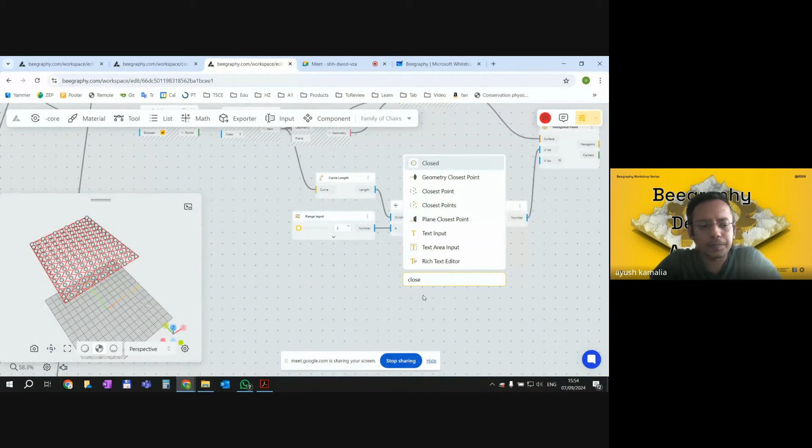So curve proximity - what this component does is, if there are multiple curves defined, it tells us what is the closest proximity between them. This is our indirect way of identifying that dimension.

So let us add both of these curves here, the first curve and the second curve, and what we get out as a number is the distance between them.

Let me just reload it. If there are any errors, because it's a web-based thing, just reload it and 90% of your problems will be solved, as we see.

Again, I just need to divide and round off the number, so I can copy the two nodes, divide the top number here. We're already rounding it off, and then add it to the V side.

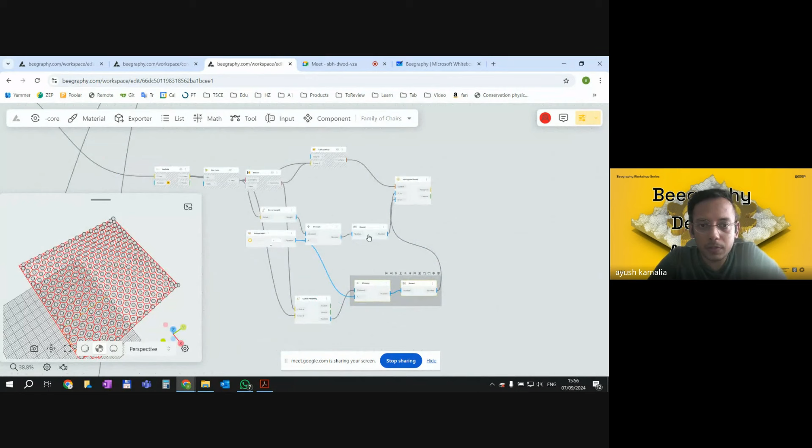Our mesh should be homogeneous now. Perfect, but it's extremely dense, so I'm going to increase the dimension for now, and then we can come back later and make it thinner. Okay, so we got the mesh.

What we can do now is, let's say our individual cells are like this, we can offset these cells inside, and then put a surface between them, so we get a slightly smaller cavity.

What we're going to do: we got the hexagonal panels, and then we're going to offset the curves. We want to offset the hexagons, and how much? We enter it directly here, that's 0.6.

But what is happening? They are going in the other direction, overlapping with one another. I want to offset them inside, so I'll just put a negative in front of it. And it looks good.

Perfect, now we can just loft our inner hexagon with our outer hexagon, and then we get a surface in between them. For loft, we need to provide two curves. Here we're working with a large data set, so we can graft them so that all of the offsetting and all of the lofting can be done in a single step.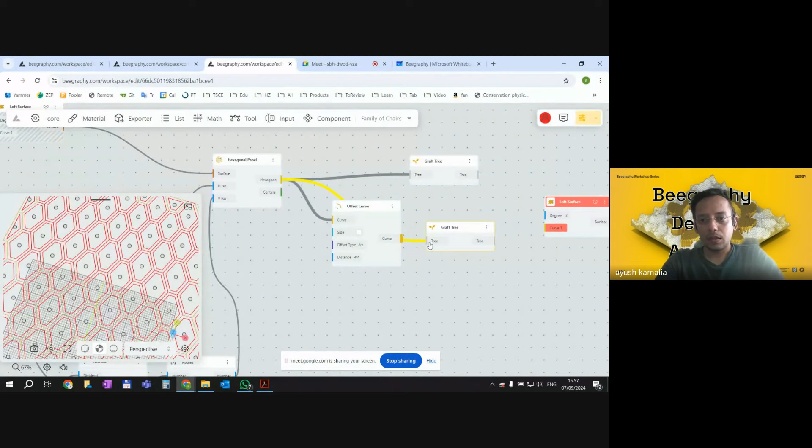Perfect, I want the first curve and the second curve. Lofting happened, great, we got the mesh as well. If I just hide them - awesome, so we got the base surface in.

If I switch on this mirrored geometry and this geometry, we have the front sitting base as well. We just need to create the back surface.

The process is extremely similar. All of the meshing remains the same. We just now need, instead of a line here, to change the input line from our back.

So what we can do is take our back line, and then again, this is our back line. We can similarly explode the geometry and use list item to get the correct curve, and then input it there.

We exploded the geometry, now list item. Great, so this is our item. We just now need to apply it on this thing.

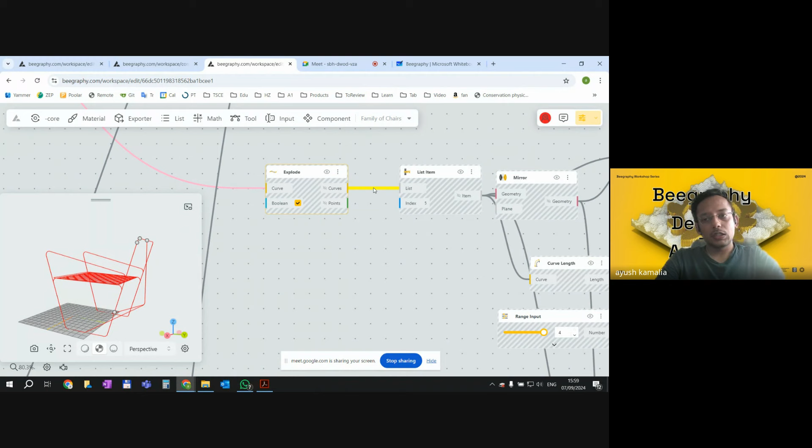Let me create a node here, and then we can copy the entire thing.

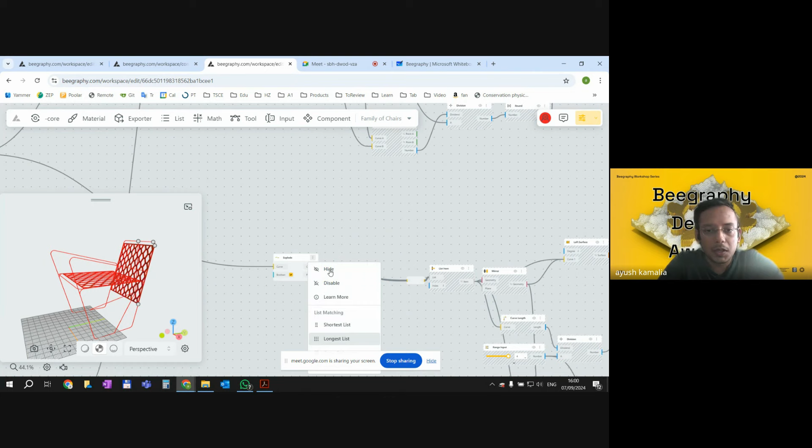So we are going to connect it here before the explode, and then we need the index to be 2, as we identified. Let's just connect the base curve, and our index is going to be 2. And as soon as we did that, we got our back meshing done as well.

We are almost there. We just need a frame around our unidimensional elements, which is, let's say, the easiest part of the entire evening. We can use a component which is pipe.

And then we have to define a radius, which we want to take from user. So it needs to be a range input, and it needs to be a radius. So let's say I can have a radius of minimum 1 centimeter up to let's say 2 or 3 centimeter. Let's go with 2. I want to start with a radius of 1.2 centimeter.

I put the radius here. And then in piping, I need to put both the left side and the right half, so I can merge them together into a single list. And then we can just provide this curve as input to our chair. And we have all the piping being done as well.

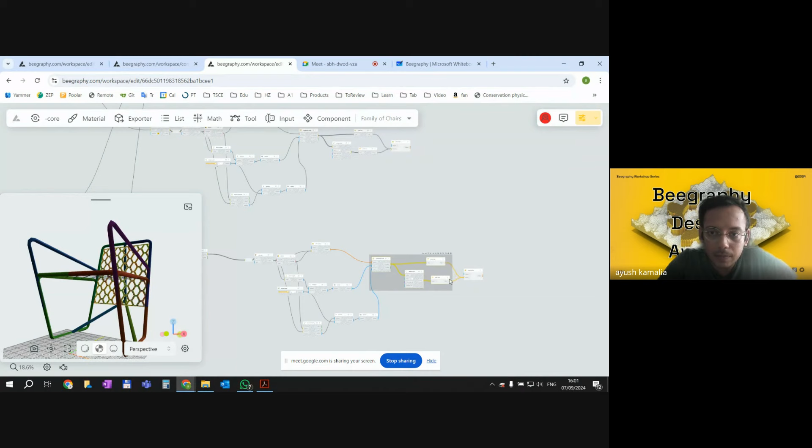If we just turn off the visualization of the curves, we will not see the red lines. And then simply you can apply all the different kinds of materials. We already saw in detail about material application with Divya, so I need not go into detail for that.

And then let's try to see whether it is working parametrically or not. First thing I want to change is I want to increase the backrest height. We have our backrest height somewhere. Let's increase it. Let's see what happens. It took a couple of seconds and perfect. I have a chair which has a much higher backrest.

I want the chair to be deeper. What we can do is we can increase the depth of the chair from 60 to let's say 70 centimeters. It will take 4 or 5 seconds, but you see the power that we just created a system, and doesn't matter which kind of chair we want, what kind of function we want, everything can be achieved directly.

Cool. Any questions you guys have now about this before we move to the next part?

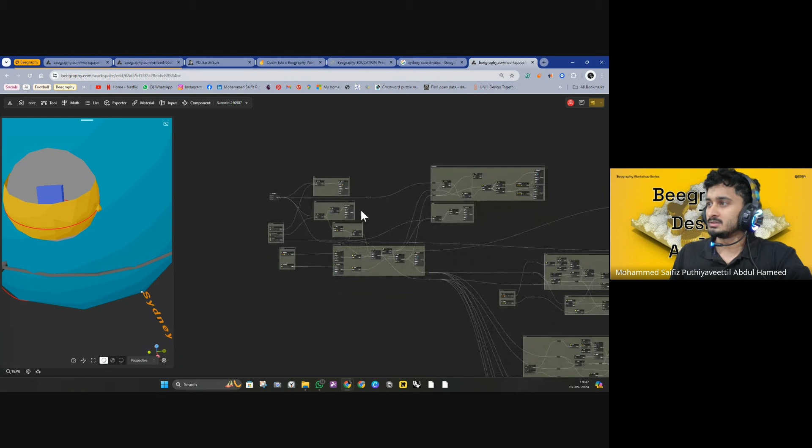So this is the basic setup. I'll quickly show the script I will have to develop. Ignore this part, this is not as complex as you see it. We will be starting from here, develop the basic geometries, sun, orbit, Earth, and then we will look into the positioning. So this is where we figure out the revolution of Earth and also the rotation.

What I forgot to mention was that since we are doing a basic model, we will be taking some assumptions. For example, the axis of Earth is not exactly vertical, so there is an axis tilt, but we are ignoring it for easier calculation of the geometry. Also we're considering the geometries as absolute primitive geometries, like planets are perfect spheres, orbits are perfect circular. Also the position of the sun is exactly in the center, which if you look at the exact model, it's slightly shifted and elliptical in nature.

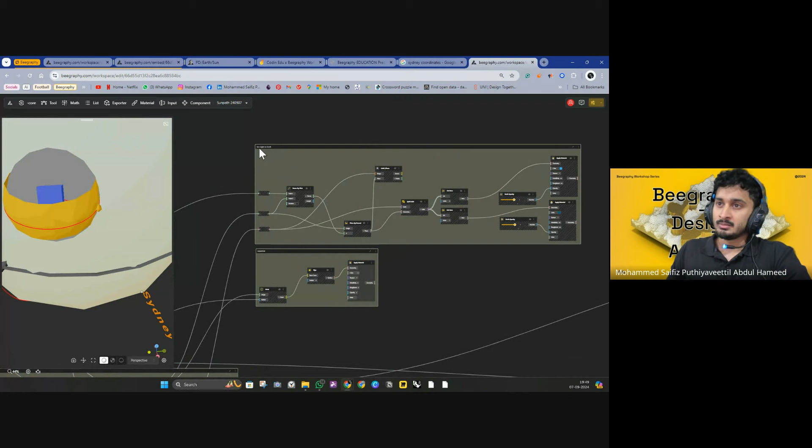So in this part we'll look at revolution and rotation. Once that is set up, we could find demarcation of the daylight area. So this is being projected from the sun, and we find that line. We'll also demarcate the equator, which is a fairly simpler procedure.

Then we come to a slightly more challenging part of the exercise, which is to figure out latitudes and longitudes. The longitudes is fairly simple because it's more on the vertical, we just need to get a vertical strip and then we rotate it. While the latitudes would be a bit more complicated.

I'll explain it through some sketches as we move closer to the script, and then once that is done, we'll be doing a bit of location naming. That's also a simple script. The important thing is this can be done for any other exercise as well, for labeling any diagrams or any particular element of your form exploration.

Once that is done, we'll set up a base plot, which is this circular base. We'll add a small block to it, and then we'll draw the sun path. This might take a bit of time, but I'm sure once we have gone through it, we'll understand how that can also be dealt with quite easily. And that's the challenge.

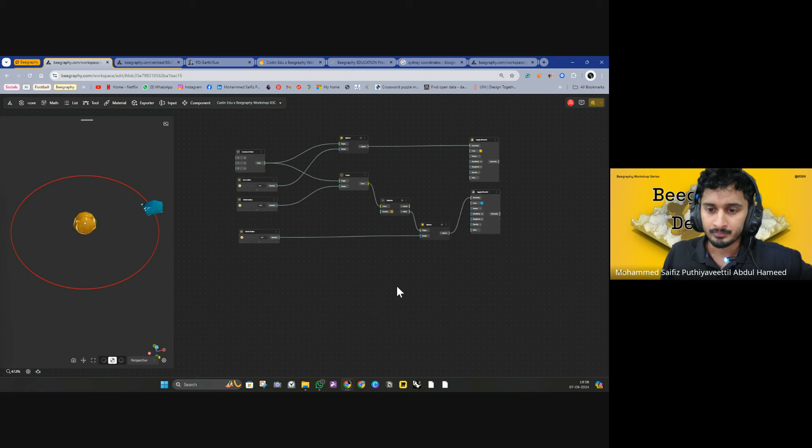Now, once these are set up, our next step is to create rotation and revolution of Earth. Okay, so this is where we'll introduce a concept. So open something like this. Okay, so we have sun, and then we have the orbit, and we have the point, right? So this is where everything starts.

And now we have Earth. Now there are two things to think about: one is the overall rotation, revolution of Earth around the sun, and then you have an axial rotation. Now this is what decides which day of the year it is, and this rotation is what decides the time of the day. Now we have to run these in parallel.

And this is where the concept of remapping comes in. So you have a component called remap numbers, and the reason we do it is we need to align data with different units. So what we're doing is we have one revolution - let's say it starts from 0, and then you end up at 1 year. And we have another unit where it's 0 days, then you have 365 days - this is what makes a year, this is 1 year. And if you think about 1 day, it's again 0, then you have 24 hours, because we'll be giving the time in hours, and then we'll be giving days. So in order to match all of these, this is why we do the remapping of this data.

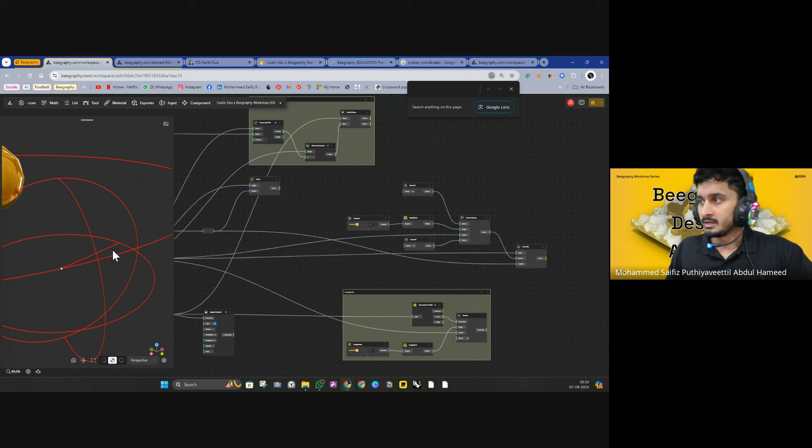Okay, so that's the line that we have, and of course it's at 0. So if we adjust it, what you can notice is when it's negative, it's going up, and when it's positive, it's going down. However, we want it the opposite, so we want it negative and it goes down, and positive.

What we need to add is we need the data to be inverted, so we add an opposite component to it. So now if you hit 90, you have it here. If you hit -90, it's there. Okay, so in terms of latitudes, we have this particular vector.

Now, as I mentioned earlier, we need to find the intersection of this line. Only then we get the point, because what we are looking for is that geolocated point on the planet.

For this, we can use another intersection tool, which is intersect surface curve. We have a curve, but now what we need is a surface. You remember we had deconstructed the planet, which is the solid. But when we deconstructed, what we get is curves, surfaces, and points. And we can add that surface here, and that gives the exact point where it intersects.

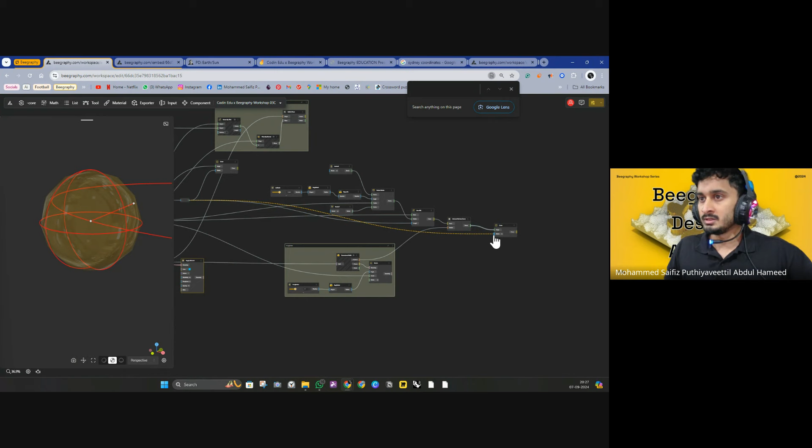And we'll have to do it parametrically, because if we give a particular value to this surface, sometimes it might not intersect. What I mean by this is, so we have the point, and I mentioned we could draw a circle, right? And it has to be in relation with the sphere. So the data that we have of the sphere is the radius of the sphere. So if we give the radius of the sphere, what happens is this goes till the center of the sphere, but then if you have a longitude which is on the side, it won't intersect.

So we have to make sure that this one covers the whole sphere. From a geometry point of view, this is basically the diameter. So if you multiply the radius, then it should always be included within. So you can add a multiplication component here. Add this, and then just make it twice.

Now you have a thing which is much bigger. You can use the component curve to surface. Now you get the surface. And what you need to find is the intersection of your other curve to the surface, and then you'll have that point that we are looking for.

So we have intersect, surface and curve. Exactly. So we have the surface, and the curve is this curve that we have rotated, the final one. Take it, add it. Okay, so now we have the point, and then we can hide all the other things.

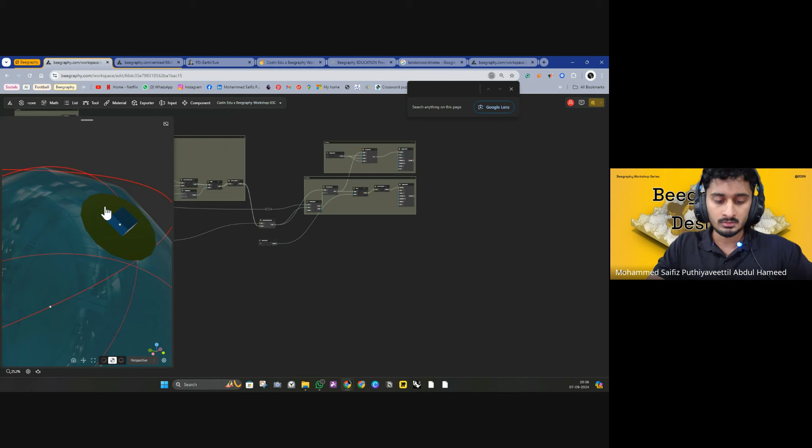So in this case, what we need to create is a sphere around this geolocation. So let's start with the sphere, and we give the radius that is same as the radius that we gave for the base. The origin is this point.

And then we'll do something that we did for this one, which is to find two rings. I would say three rings. I'll make a new one. So in this case, what we want is we have this as a base, and then we have the, say, the building block that's here. There is a particular angle that...

is assumed to be the normal sun path range. And then what we need is two rings, top and bottom. And then we just need to create a surface along this, right? So that's what it is. So if we look at it closely, that's what we can see.

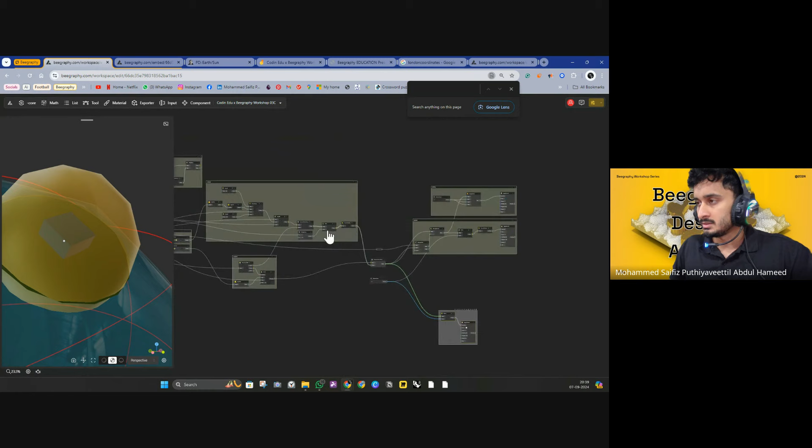What we need to do is something similar to this. So we have to rotate, identify the vector, keeping this as a base, and we have to identify an angle which is somewhere around the range of 21, 23. And then we find the same point at the bottom and get the rings.

So for that, we need that particular value, which is, let's say, 23. We want minus 23 as well, because we want the ring at the bottom. And then we want a ring at the center, so that would be 0, because this will help us create a nice loft, a nice surface which replicates the sphere as well.

Now we need this in the same order, so for that we can use a list merge. That goes there, and then now we have 3 of them. So these are in degrees, therefore we need to convert it into radians.

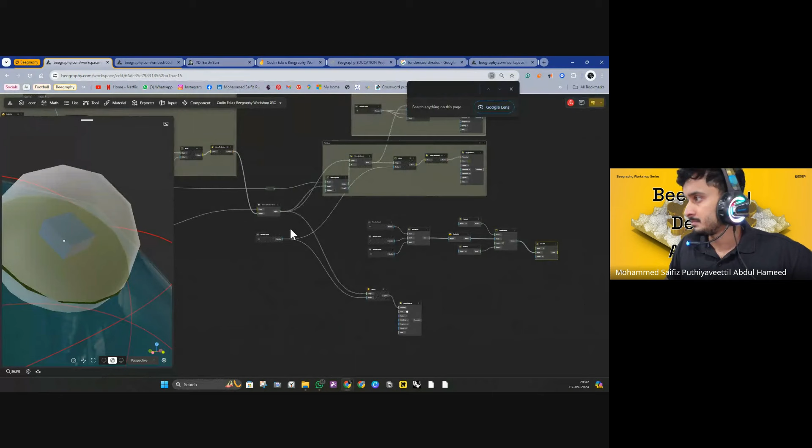And then we create a line, using Line SDL. So the vector is this, point is the center point, which is here, and the length is the radius that we just gave. So that creates 3 lines.

As we did earlier, we need to deconstruct the sphere so that we get the surface. So we do the same thing: we deconstruct, and then we extract the surface. Then we add it to the intersections with the surface, so you get these 3 points.

What you need to do is to slice it at these points. So currently we have 3 points coming in, and then we need to create the normal plane, so that the plane is what we'll use to create those slices of the sphere. So we need to create a plane using the normal.